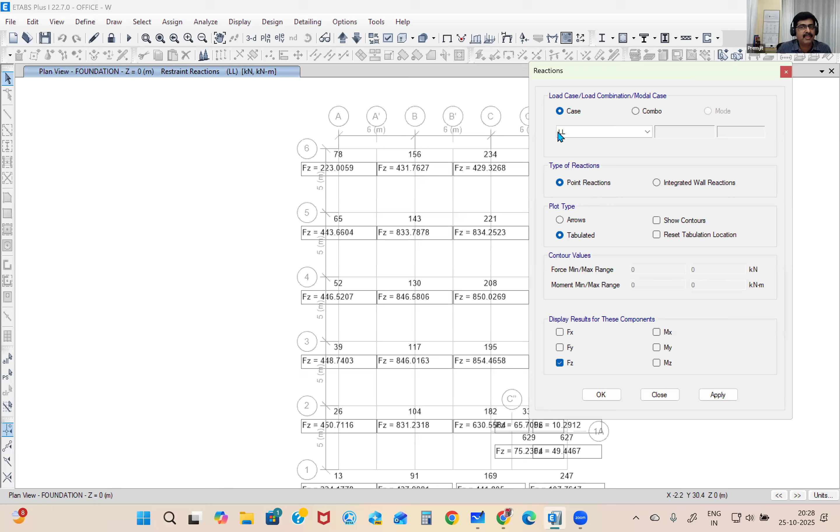The idea is to convince you that certain things are very important. So these are the reactions - I have displayed the live load reactions for this particular model. This is a multi-floor building, and I have displayed the live load reaction alone. There's a reason I selected only live load - it's easy to do only for live load, that's why I chose that.

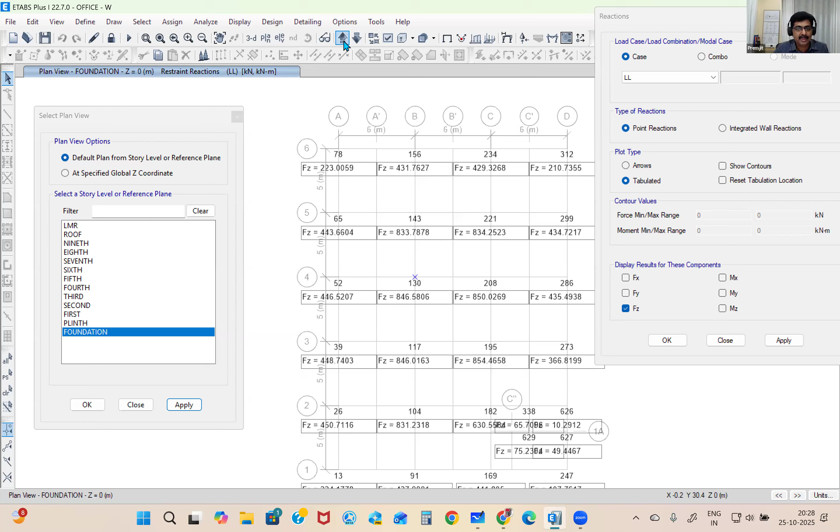So let's pick this particular node. Let's validate if this 850 reaction is approximately correct - it will not be exact, manual methods will have minor differences. So let us see if this is correct - 850. Let me go to the next level. Somebody remember this, approximately 850. Let me go to this level.

So here you can see 6 meters, here 6 meters, and here 5 meters, here 5 meters. So this node will carry half the load from this span, half from here, half from here, half from here. So approximately it will carry this much slab weight - around 5 multiplied by 6 meters, 30 square meters in one floor.

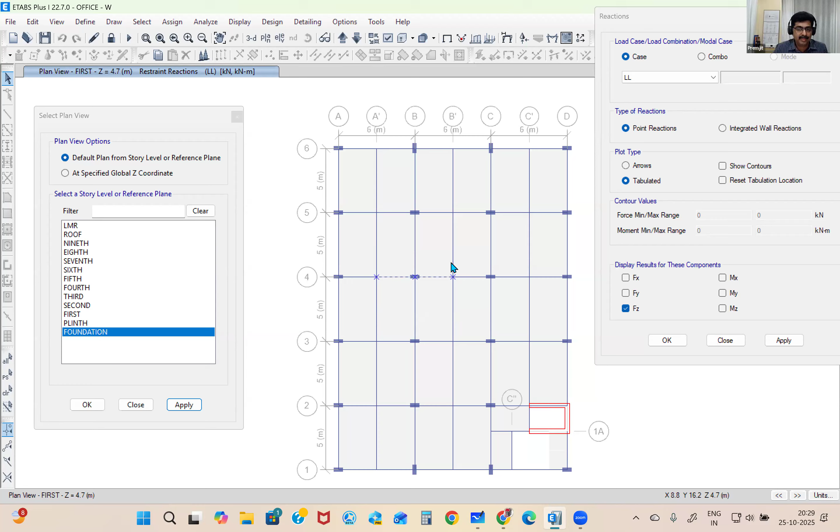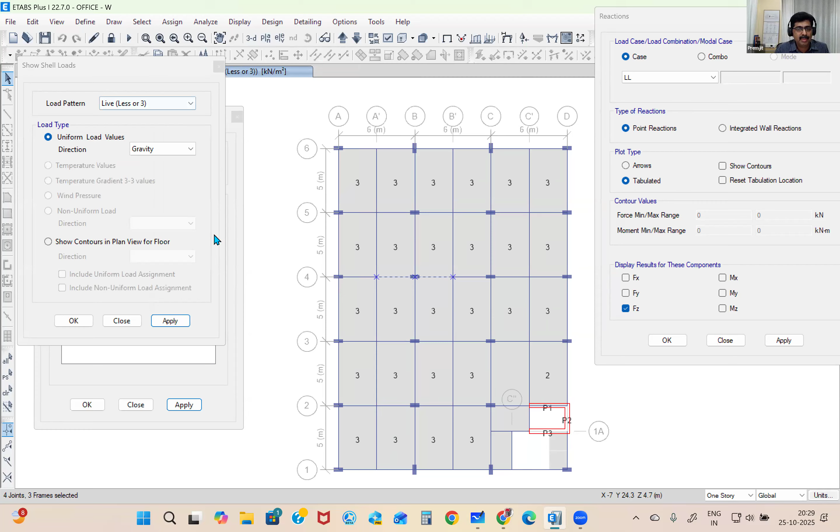Now let us see what load is applied on this - display, load assigns, shell. You may not know ETABS, that's okay, some of you might not know it, that's perfectly fine. Our intention is only to understand the process, so even if you don't know ETABS, that's okay. So here we have three - in all the floors you have three, and in the last floor, the terrace, you will have a little lesser load. So you have three or less.

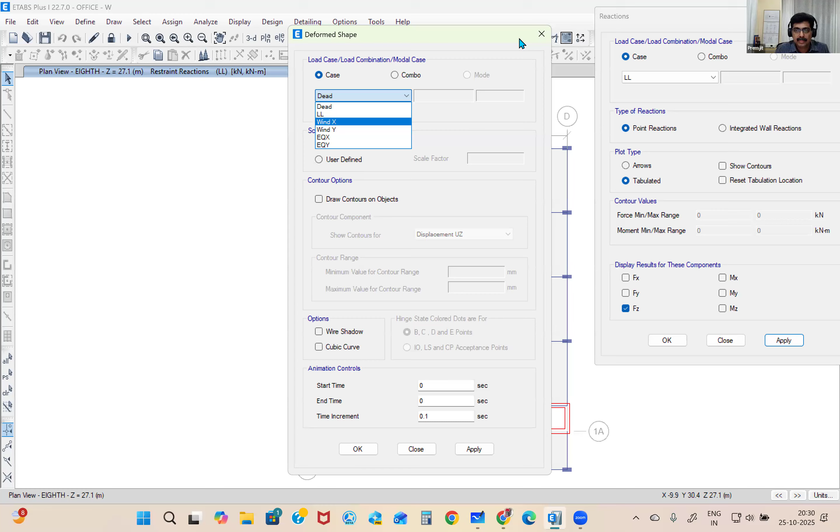I think the analysis is broken. Give me 1 second.

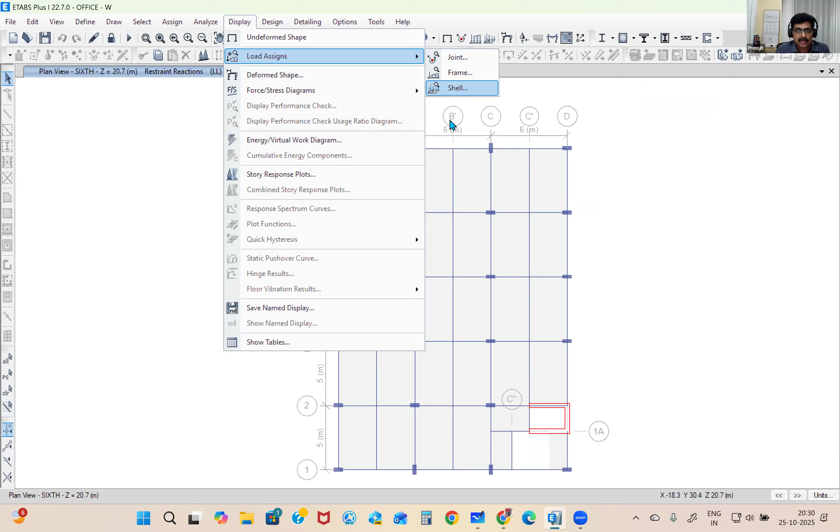So in the terrace you have 1.5, and in the other levels you have 3. So the area is 5 multiplied by 6. Every node is carrying 5 multiplied by 6, 30 meters square of slab.

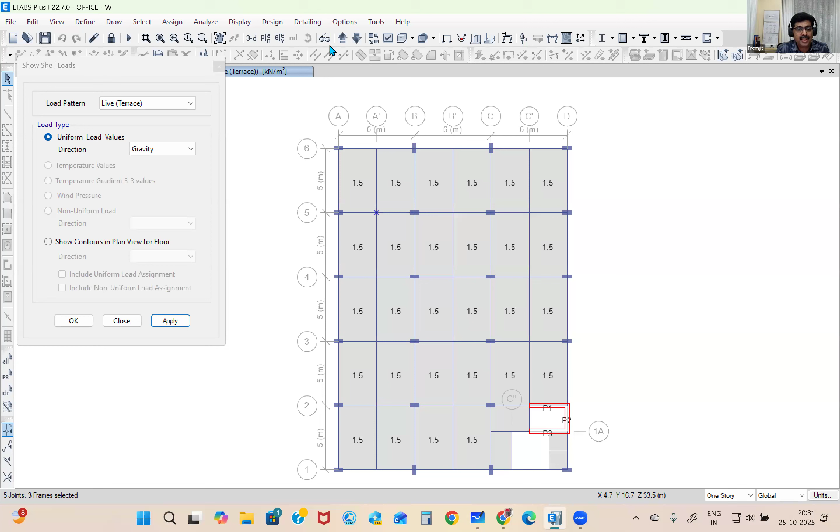Now we have how many floors? Let me take the elevation of this. Okay, now you can see this is terrace. Apart from that, 1, 2, 3, 4, 5, 6, 7, and 8 levels.

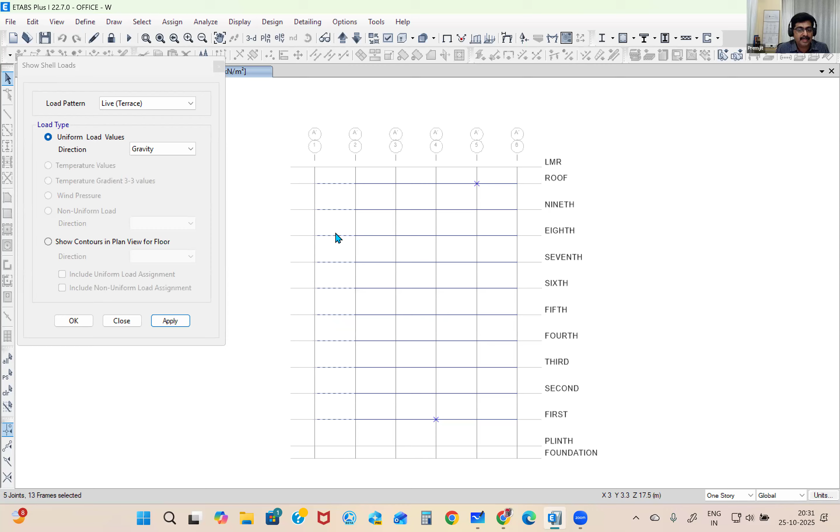This is the plinth level. And in the plinth level you don't have a slab. So you have 1, 2, 3, 4, 5, 6, 7, 8, 9 levels carrying 3. So 3 multiplied by 3, the load. You have 9 levels and you have 30 as the area.

So that became 810. Please note down 810. I will repeat: 3 is the load, 30 is the area, 9 number of floors, 810.

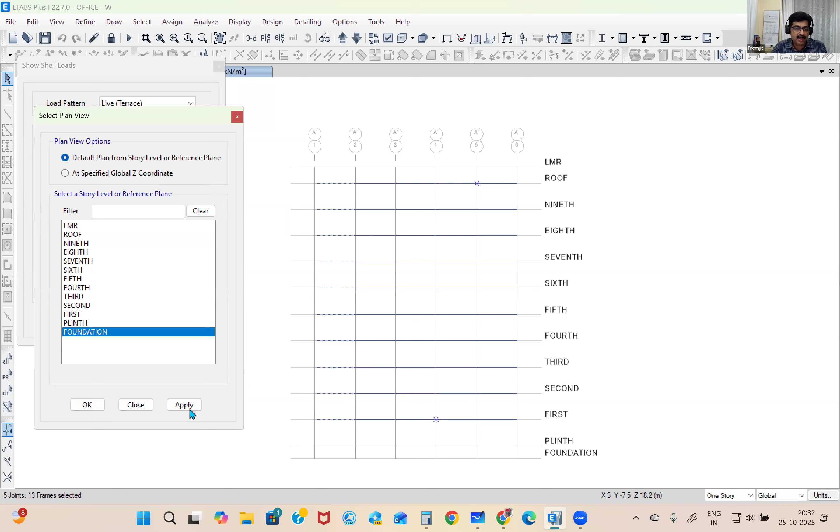Now one level has 1.5 load, and you have 30, and you add that with 810, you get approximately 855. So this is what you have. If you look here, that is what you had approximately, 846. Minor difference will be there as I told you.

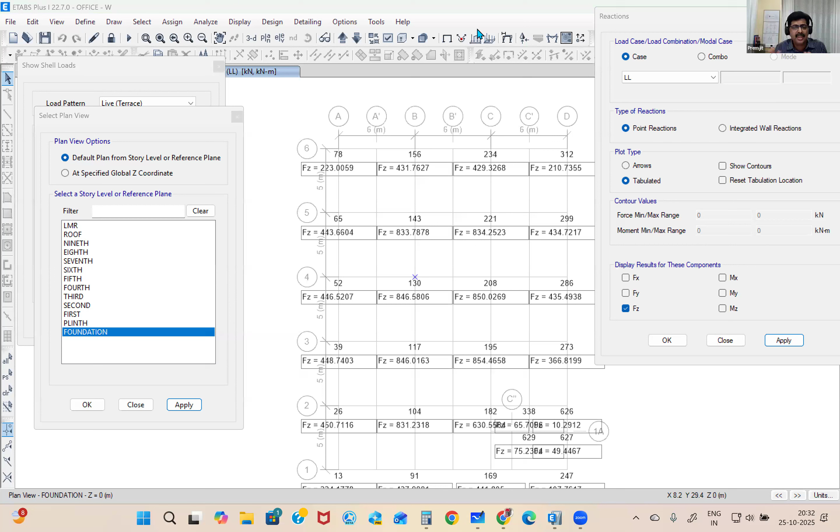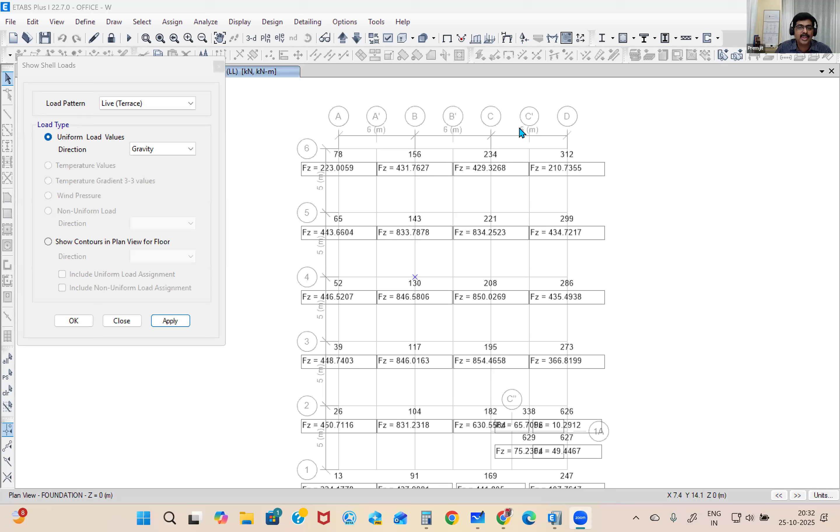So this is one validation. There are many more things that you need to do. This is a very simple step. Those who are already into structures know that this is a very simple process, but in this way you need to validate and establish that your load calculations, your load takedown and various behaviors are accurate.

So if you do this, you will have more confidence. How many of you feel this is something which is very, very important? You already told it's important. So tell me how many of you feel that it's extremely important? So this is how you validate.

One method I told you to validate the reactions. There are many more. There are many more behavior based checks that you have to do. The simplest one I told you right now. Like this, you need to be able to do that.

Now, again, just to add to your confidence, you are closer than you think. Just one shift in approach can change everything for you. Don't worry if you are new, if you are struggling, everything is possible.

Okay, and please note, after this story, I will take you through a few killer questions. Some more questions that people ask me, very important questions and very funny sometimes. Not funny, I would say, very very innocent questions that students ask me. I'm going to show you that. Maybe you also have some of these questions.

Okay, before that, my initial struggles. I also struggled like you. I started my job as an odd job, doing some side job. But good thing or bad thing, I quit it very soon.

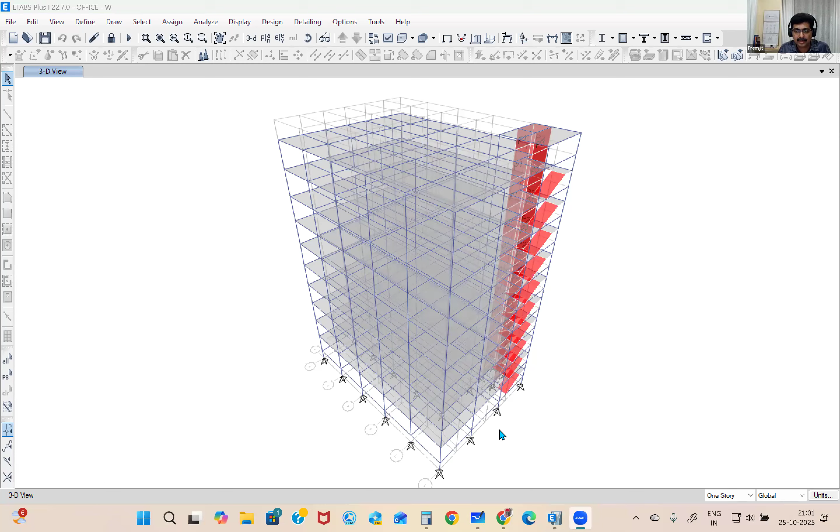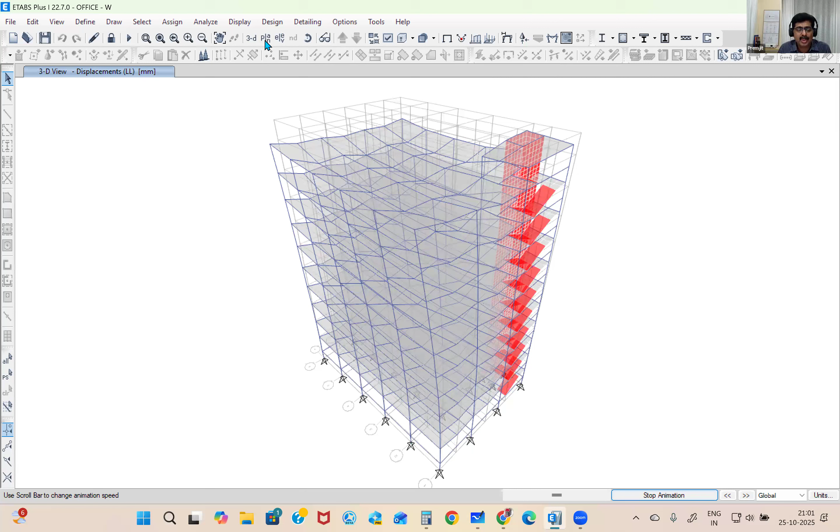Only if I do a dynamic analysis will it be more prudent to see the mode shapes. So what happens is the weight is all same, but this point has a lot of stiffness - a very large column exists there, which acts more laterally. That will create torsion in your building as well. That's not a great design, you need to move this.

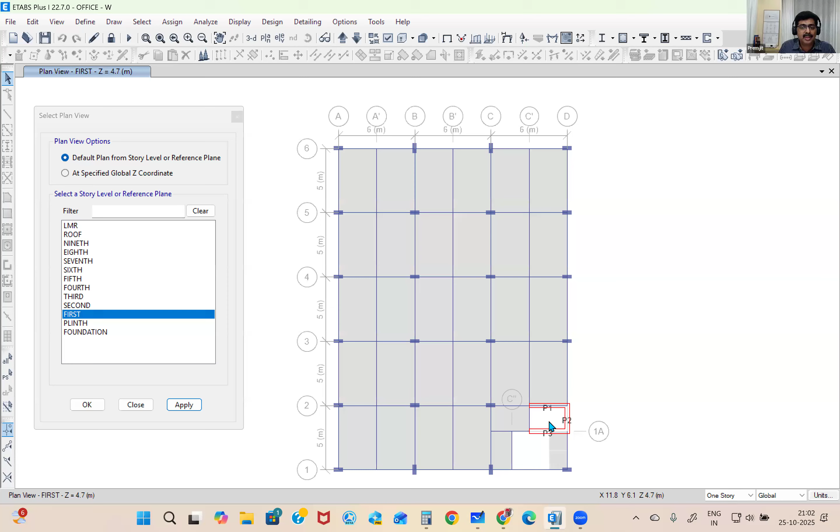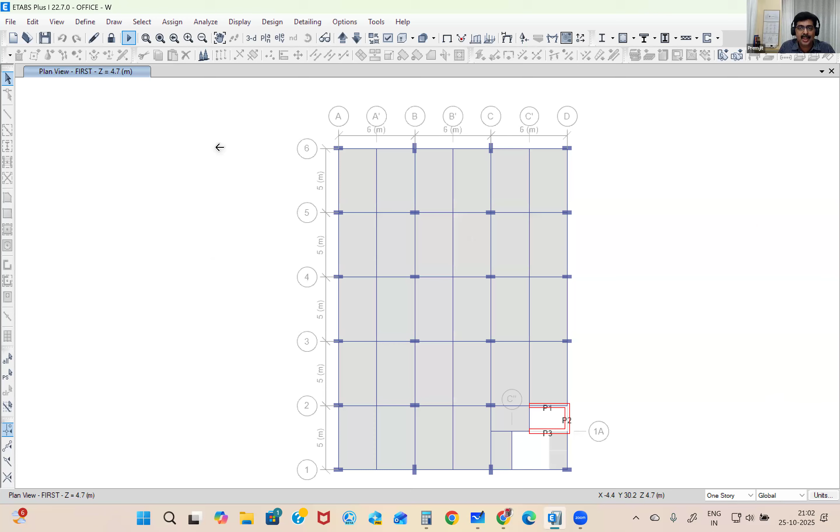So these are the things you need to know - how to influence the architect and make changes, or how to balance this is what you need to be able to predict. This kind of learning is more important than learning a tool. Let me move on so we cover everything planned for today. It's very important to learn with a good, organized way of learning.

Now if you learn all this and present your things really well, others may doubt you. Say you are a site engineer trying to transform into a structural engineer - people may doubt you. But then your results are going to silence them. If you don't learn the right things, people can still doubt you.

Now the third secret - structural engineering is not about opening an office, sitting in the office and doing it the conventional way. That time is gone, this is 2025. You have a lot of avenues. Consulting is one thing - yes, it's still a really good option for you. Other than that, there are a lot of things.

AI is going to give you even more opportunities, and this is your chance to be the first in new opportunities. You can diversify your portfolio, you can do many things. You can teach, you can create content, you can contribute to AI programming. There are so many things that you can do.

And when you apply this, your colleagues will start coming to you for answers. How many of you are in site? Many of you are site engineers. How many of you are not able to take decisions on your own, or not able to answer your juniors? Feel free, no worries, nobody is going to ask you anything. Say yes if you are struggling to answer your juniors.